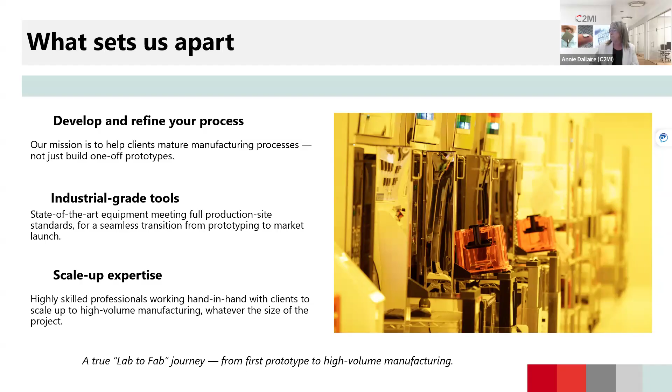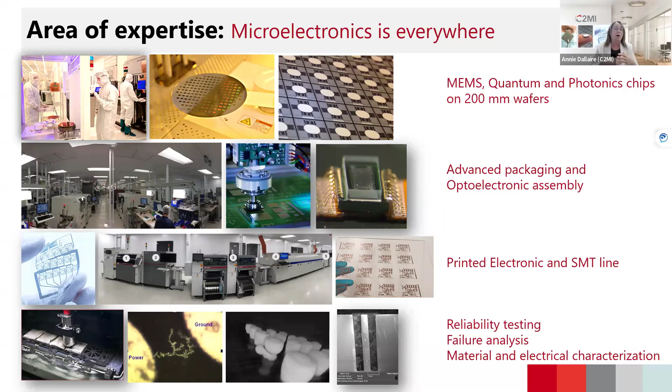In fact, C2MI is designed as a one-stop shop for companies developing microelectronic processes. Under one roof, we bring together our complementary areas of expertise. First, we have a MEMS, quantum, and silicon nitride photonic pure-play foundry on 200 millimeter wafers. We also have a packaging and optoelectronic assembly sector, a printed electronic and card assembly line, and a fully equipped analytical lab. Each of those pillars plays a role in supporting innovation, but it's really open to any kind of project that can require one or more of our expertise.

So before I dive deeper into our capabilities, I'd like to show you a quick video that is a virtual tour of C2MI. It's just two minutes, but it will give you a glimpse of our facilities and infrastructure. So hope this is going to work, let's check it.

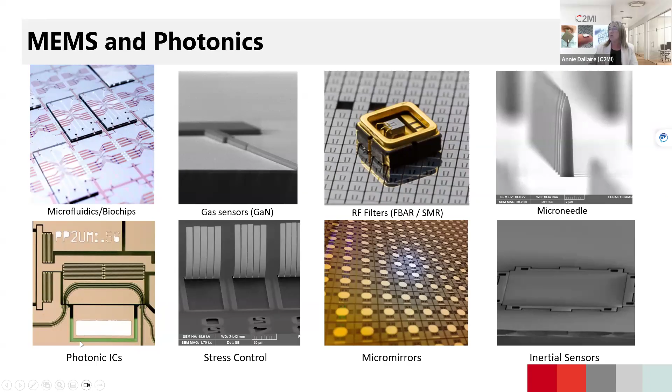Like I said, we also have photonic platforms. On the photonic side, we offer fabrication of silicon nitride waveguides. But since we have a lot of expertise in MEMS as well, we can couple that with advanced techniques like doing a suspended waveguide, a facet etch, or V-groove. I also have in my presentation most of the equipment that we have. I don't want to go through each and every detail, but if required I can share this presentation at the end, so that it gives you a bit of what we have, but I'll go very quickly.

So of course, like I said, 200 millimeter wafer, like a pure play foundry. You come to us with your design and we develop a process for you. We have many equipment to do photolithography, of course, coat and develop a thin or thick photoresist or polymer. We have a lot of metrology, all in a production mindset.

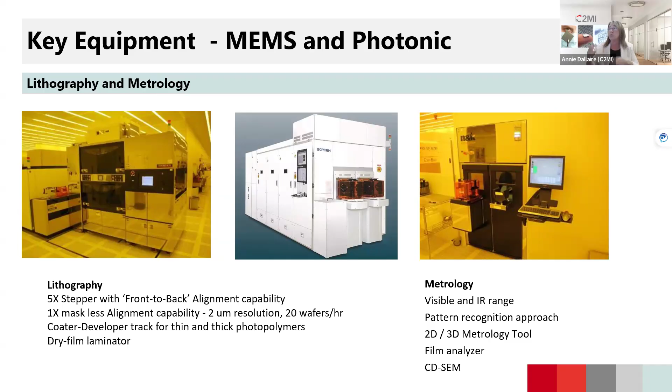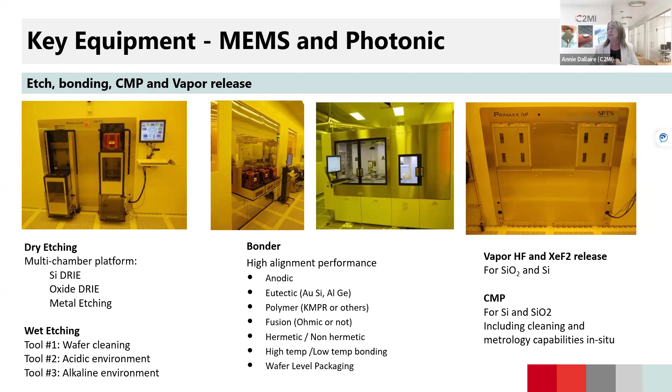So all in, pattern recognition approach and fully automated tool, as you can see. We can etch your wafer, the films, of course dry etch, wet etch. We have a pretty good bonder to do all kinds of bonding of wafers. Since we start with a MEMS foundry, we can release structures.

So we have vapor HF or xenon difluoride release, TMAH as well. Many films that we can deposit from vertical furnace, thermal, PVD, CVD, or plating as well. What else? Metal sputtering, of course. We do have ALD, and we even have ion beam trimming, so to trim the surface of the wafer for nanometer scale adjustment of your thin film or directly the silicon.

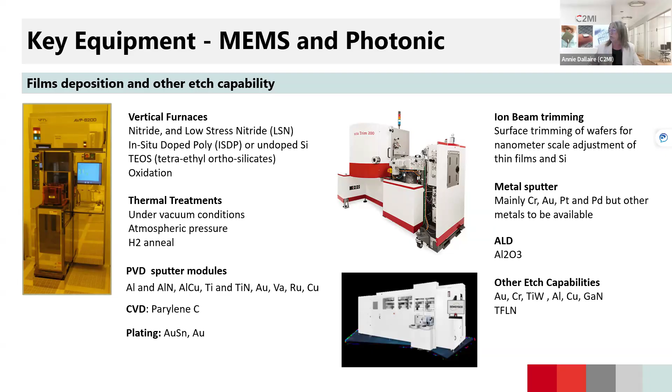So like I said, very, very quick. Don't want to spend too much time on that, but I'm happy to follow up with you if you need more detail or have some questions.

Second expertise: packaging and optoelectronic assembly. Here again, our clean room offers a wide range of processes tailored to meet the needs of next-gen devices. So all kinds of packaging that you can imagine, we can do it.

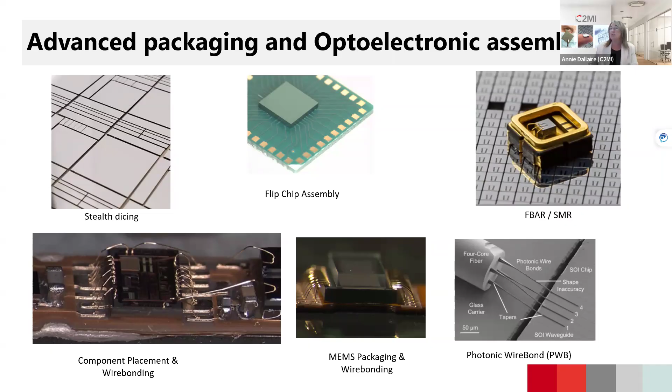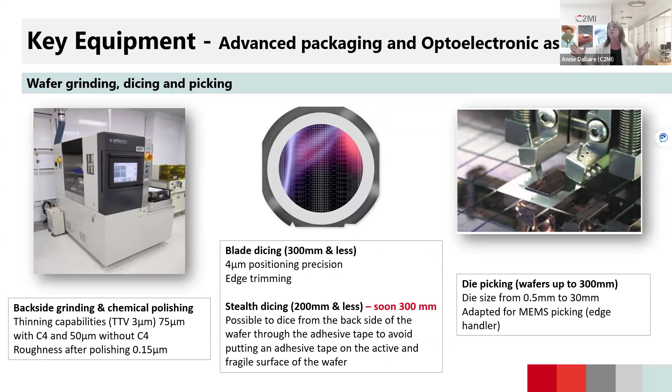So we start with the wafer. At wafer, we get backside grind, blade dicing or stealth dicing wafer. We can start on 300 millimeter wafers down to as small as you have. We can pick the die, of course, but many of our die placement machines or component placement machines can directly pick on wafer or pick on gel pack or whatever format your part is in.

We have many die placement tools that are able to meet a lot of requirements. So really depending on the project that we work with you on, we will choose the right one to adjust for your requirement and be sure that we use the most cost-effective tool for your production afterward.

Of course, electrical interconnection. So we can work with C4, copper pillar. We are pretty strong in wafer wire bonding. So we have all kinds of wire bonding - it could be ball bonding, wedge bonding, ribbon bonding.

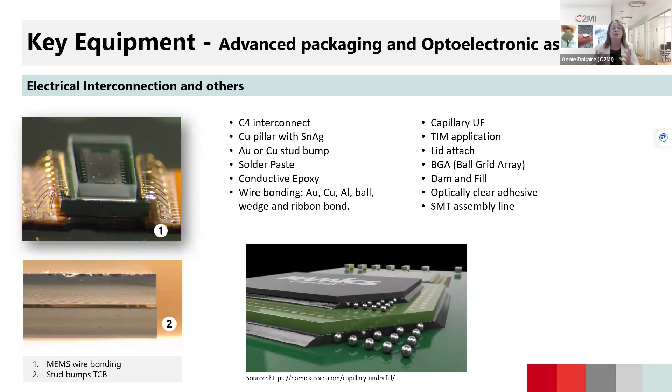Of gold, copper, aluminum - we have all the possibility or expertise as well to do lid attach, die attach, and since we are in the optoelectronic field as well, we have a lot of expertise to work with optically clear adhesive if required.

Just to continue on the optoelectronic assembly, we are able to do full passive or full active alignment of any component. So we have some semi-automated benches that we work with to develop the process, but when it's developed, we have fully automated tools able to do active alignment of components and weld fiber optics as well.

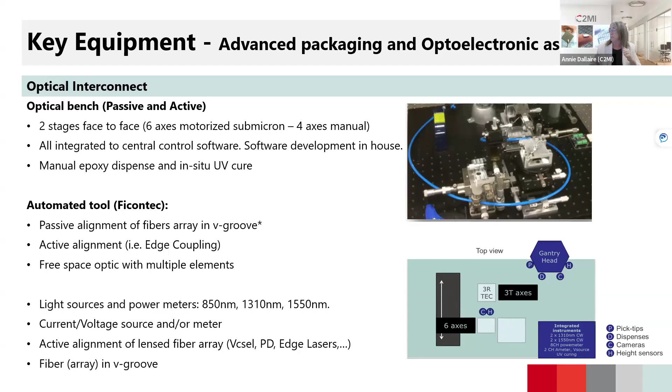And we also have this new technology usually called photonic wire bond, where you can 3D print a photonic wire bond interconnection. But with this tool, we can also nano print a free-form coupling element.

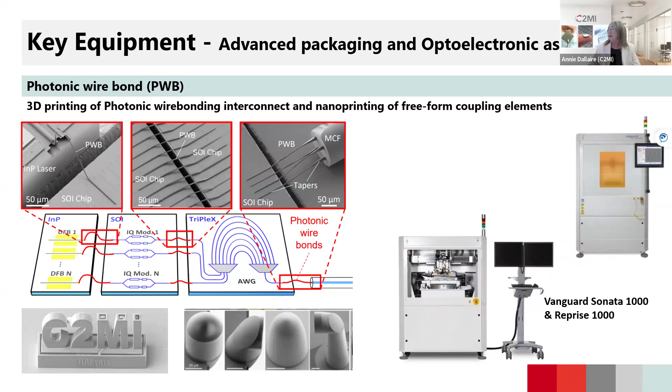Okay, that was the second expertise. Third one then. So to further support product development, C2MI has two essential sectors: printed electronics and card assembly. These capabilities allow us to support even more diverse and customized projects.

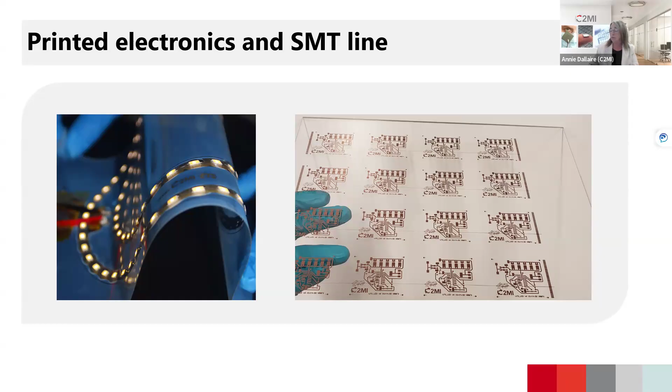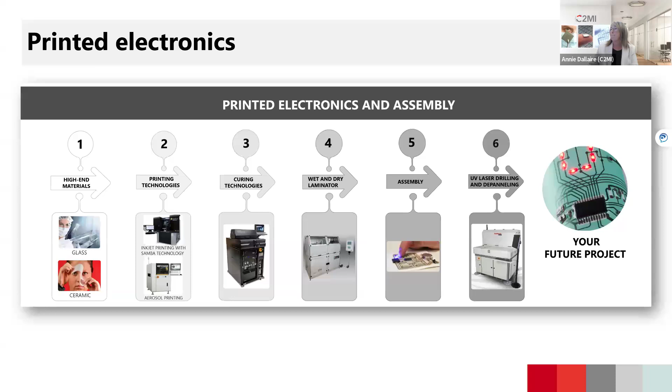So we offer a full suite of tools to build your circuit, from ink deposition with various materials to photonic or thermal curing, lamination, soldering, and even laser drilling at the end. And we can assemble and integrate all the components you need. And to complete this area, we have a fully automated SMT line as well.

So as for our fourth expertise, it's our analytical lab. We use this lab every day when we do development in all the other expertise areas, but we can offer lab analysis such as material characterization or failure analysis, and we also have reliability testing.

As a standalone project - you don't need to work with us for the development of your product to use our lab if you need. So here again, I have a few slides to showcase what we have, but I'll keep it brief so that you just have a glimpse of what we have.

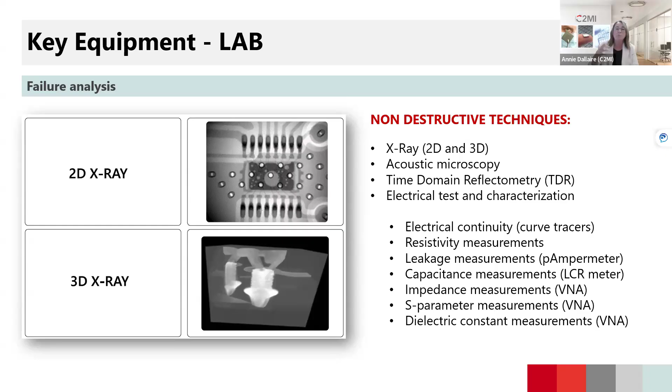So non-destructive techniques, of course: X-ray, acoustic microscope, time domain reflectometry, all the electrical and impedance measurement, etc. that we have.

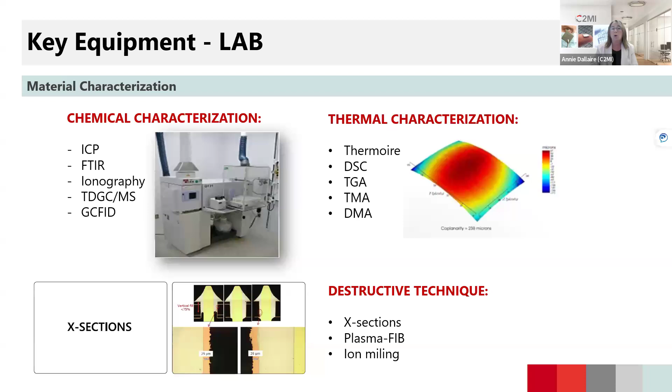We have a lot of tools to do material characterization, chemical and thermal characterization. We also can do destructive techniques as well, so cross-section with plasma FIB if needed, or ion milling to see what's happening. And like I said, we have a full reliability testing area where we can test your product to be sure that it meets the requirements of your market.

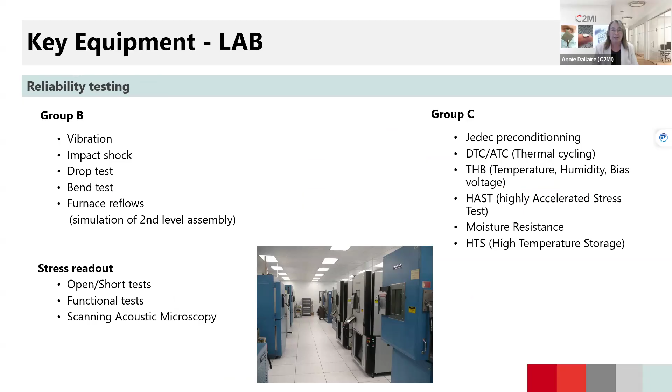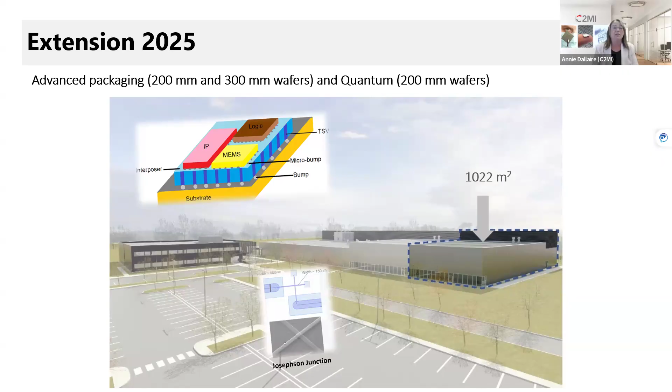So a third of the space is dedicated to quantum chip fabrication. C2MI will be probably one of the first pure-play foundries for superconductive quantum chips on 200 millimeter wafers. It's making a major step toward industrializing quantum technology. To support this advancement, new equipment will enable the fabrication on 200 millimeter wafers of Josephson junctions and the production of superconductive TSV for 3D packaging.

Here again, it will be the same mindset, only industrial tools, fully automated cassette to cassette, that will be maintained as the standard of our production centers. This assembly sector will also be enhanced to include, among other things, capabilities of indium microbumping and high pressure compression to be able to package the superconductive die.

But it's not all for the quantum. As I said, we also have a silicon nitride photonic platform. And this platform is going to be enhanced and improved to be able to have the performance needed to address the demand of quantum photonics as well. So here again, investment in equipment to improve our losses, be able to work with different wavelengths, and also adapt the packaging as well.

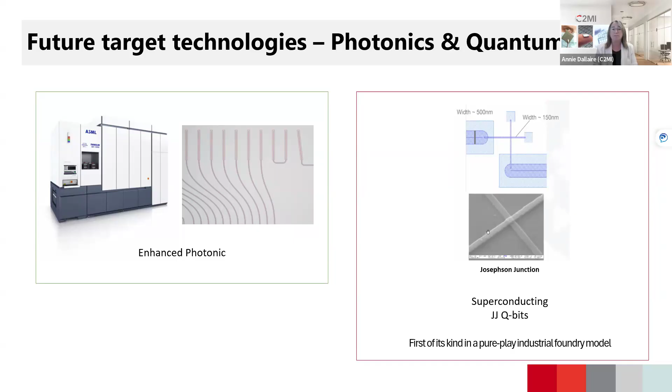So the rest of this expansion will be more focused on advanced packaging. As you know, advanced packaging is becoming a key enabler for performance, density, and energy efficiency. Modular chip integration allows specialized components to be combined within a single package. To support this evolution, we are expanding our capability to add, but it's not all here, technology like copper TSV, hybrid bonding, wafer level bumping or copper pillar, and post-processing on top of CMOS.

We already do post-processing on top of CMOS, of course, but on 200 millimeter wafers. Now all those expertises, we bring them for 200 and also 300 millimeter wafers. So those sets of equipment will be our first set that will be compatible for 300 millimeter wafers as well. In fact, the majority of them are what we call bridge tools, so they can do both 200 and 300 millimeter wafers, but in some cases we need to have two equipments, and that would be the case. So we're gonna have a 200 and a 300 millimeter wafer equipment.

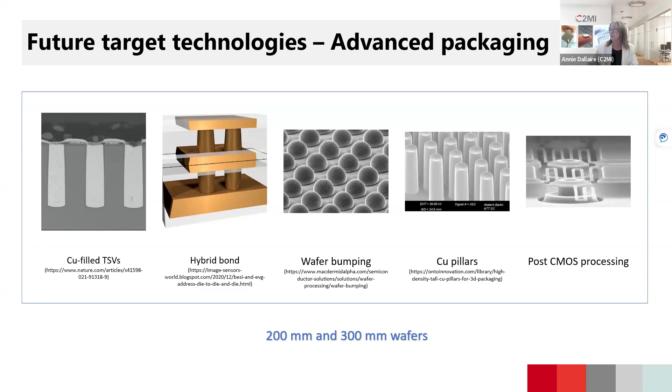Okay, so that was a very quick overview of our expertise. I just want to emphasize that at C2MI, we are deeply committed to support innovation in microelectronics, photonics, and quantum technology. And we really act as a bridge between applied research and industrial commercialization, helping a company move from prototyping to market launch. It's like helping to cross this famous, infamous valley of death between innovation and commercialization.

So our business model is very flexible. We are open to any size of project, including one or more of our areas of expertise. And we are proud to support innovation projects from clients around the world. Not just startups, we work with SMEs as well and very large multinational companies.

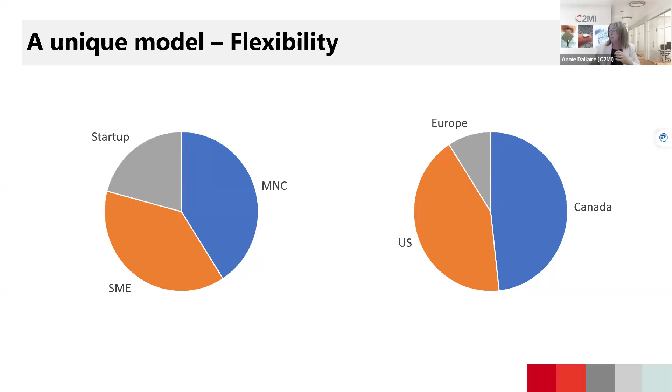Before I conclude, I would like to highlight the outstanding collaboration between Canada and UK that we've done, which Charles explained a bit at the beginning. So almost two years ago, we had this first commercial mission where Canada went to UK, and after that, like Charles said, the UK company came to see us here in Canada. During this collaboration, we learned about your capabilities, and we decided to do a collaboration, Canada and UK, that demonstrates how the strength of both countries can be combined to create a seamless pathway from innovation to commercialization.

So the project aims to demonstrate a co-packaged optical engine for AI data center applications. The prototype was really developed by leveraging the expertise of each partner across the value chain. So you have the value chain here. The design of the chip, the design of the PCB and housing was completed by the UK partner, CSA Catapult Innovation Centre. The laser was designed and fabricated by the CPFC, the Canadian Photonics Fabrication Centre, located in Canada, in the province of Ontario.

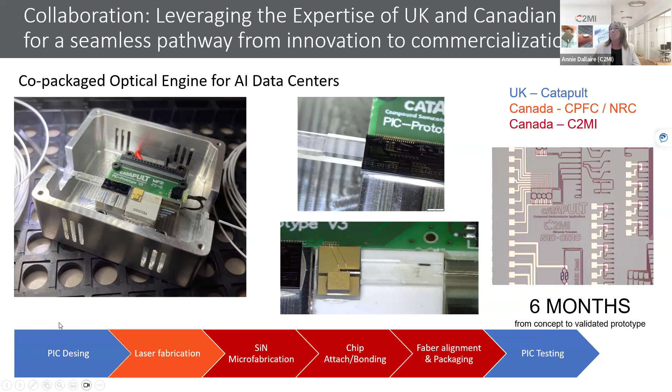So, my conclusion now - thank you for your time and attention. At C2MI, we believe that collaboration is the key to unlock technological breakthroughs, and we look forward to working with you, turning your ideas into market-ready solutions. You have my email here, like Charles said. If you want to contact me, please feel free, and I can share the presentation if you need.